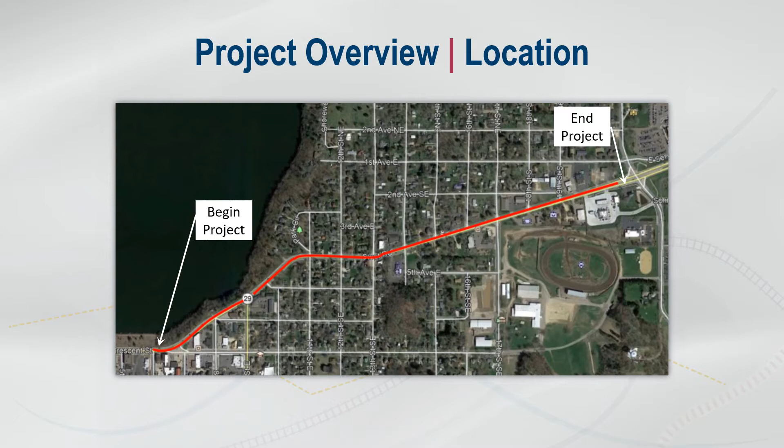Safety concerns regarding the segment of roadway have been on both the city's and the DOT's radar for some time. Between 2013 and 2019, 163 crashes were reported, including 84 rear end, 27 side swipes, and 4 crashes involving bicycles or pedestrians. In 2019, WisDOT applied for and received Federal Highway Safety Improvement Program funding to address some of the safety concerns in this corridor.

While there are several challenges and longer-term needs within this segment of roadway, the primary objective of this project is to make Stout Road safer for motorists and pedestrians.

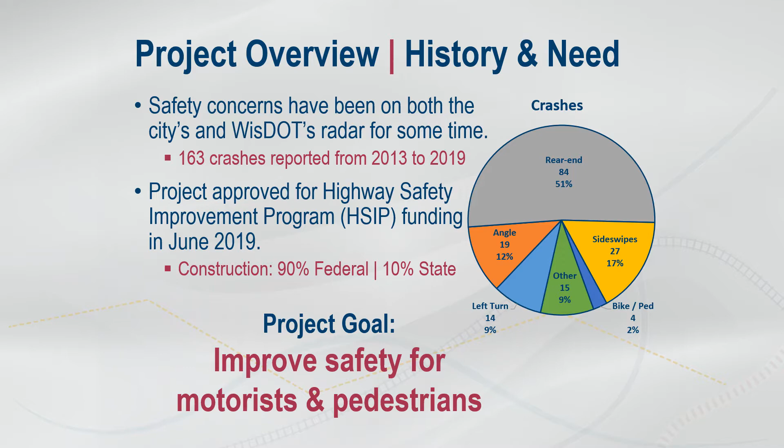Staying with the issue of safety along this corridor, there is a high number of crashes involving rear-end and left-turning collisions because of the high number of intersections and commercial and residential driveways. Many of these crashes can be attributed to the fact that there currently are no designated turn lanes for left-turn movements.

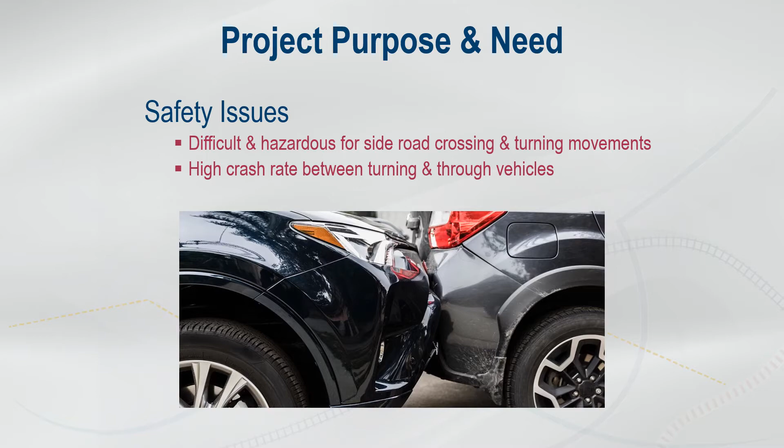Safety for bikes and pedestrians is a growing concern along this segment of US 12. With 4 lanes of traffic to cross, a distance of close to 50 feet, finding a safe opportunity to cross in a single movement can be difficult. With the current lane configuration, there is no center median or refuge area between the eastbound and westbound lanes to allow for a split crossing.

Another concern with urban roadways similar to the existing layout of this segment of US 12 is the multi-lane threat situation. This occurs when the vehicle in the outside lane stops to allow a pedestrian to cross. However, the stopped vehicle actually blocks the line of sight between the pedestrian and the moving vehicle in the inside lane. Currently, there are limited opportunities to safely cross US 12, with only 2 designated crosswalks within this 1 mile segment, one at 6th Street and another at 21st Street.

Biking along this roadway also can be a challenge. Currently, there are no designated bike lanes, so any bicyclists using this roadway must use the lanes designated for motor vehicle traffic, which may lead to conflict between automobiles and bicycles and can be unsafe.

Finally, many of the sidewalk curb ramps throughout this area are outdated and do not meet current standards under the Americans with Disabilities Act, or ADA. This can be especially challenging for visually impaired pedestrians or those using wheelchairs.

In addition to the safety concerns, the pavement surface also is showing signs of distress. The existing concrete is cracking, joints are beginning to fail, and maintenance is needed to extend the life of the pavement until a full reconstruction or expansion project is budgeted and planned for. This type of improvement is unlikely to occur for another 10 years or more.

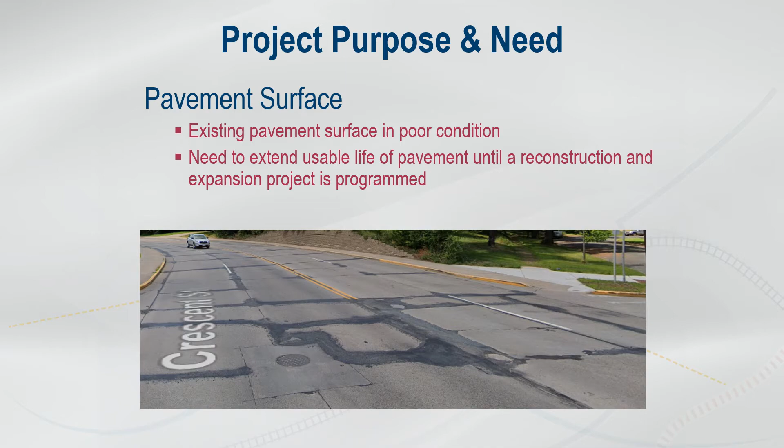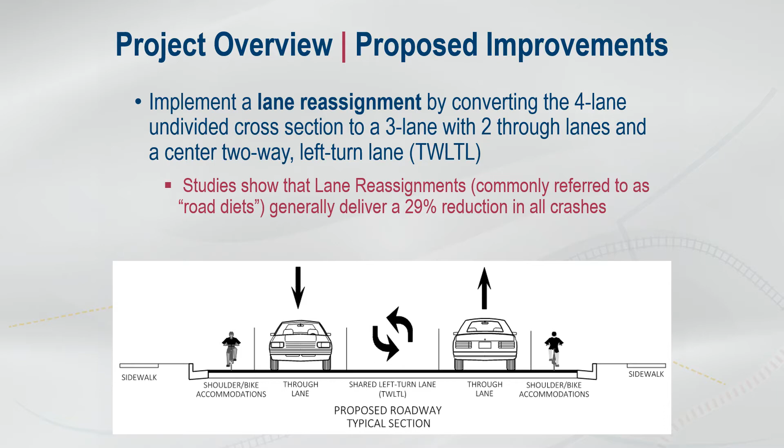The primary improvement proposed with this project involves implementing lane reassignment. It is proposed to convert the 4-lane road to a 3-lane section, having 2 through lanes and designating a shared left turn lane, or two-way left-turn lane, down the center of the roadway. Studies show that lane reassignments or road diets generally deliver up to a 29% reduction in all crashes.

One of the biggest benefits of the lane reassignment is that it removes the left turning movements from the through traffic. This allows room for vehicles turning left into the numerous side roads and driveways to decelerate and safely wait for a clear opportunity to cross while through traffic can continue.

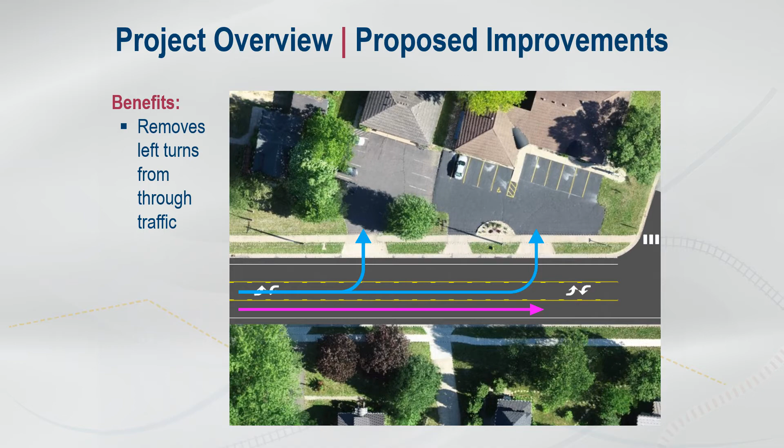Other benefits associated with the lane reassignment include the addition of available refuge area for pedestrians in the center of the roadway. The center shared turn lane area, which is 12 feet wide, will provide an area outside of through traffic for bicyclists and pedestrians to safely stage when not able to cross the entire roadway in one movement. Also, since the number of through lanes in each direction has been reduced, the multi-lane threat condition that currently exists is no longer present. The width of US 12 will remain unchanged.

With the proposed lane reassignment, excess width will be available between 9th Street and 21st Street. This area is proposed to be designated for bike lanes.

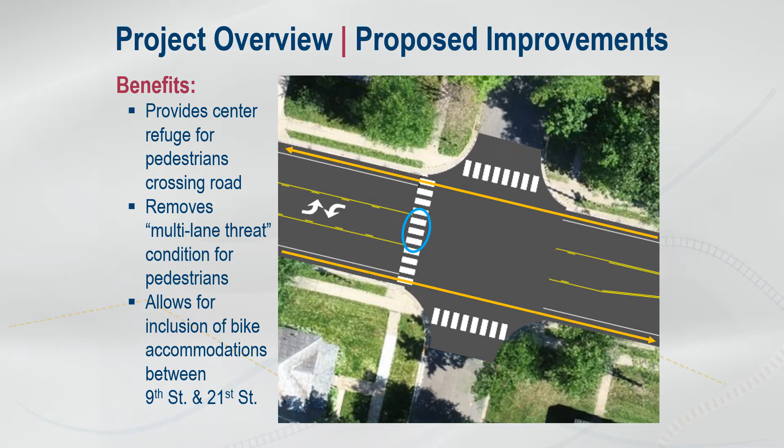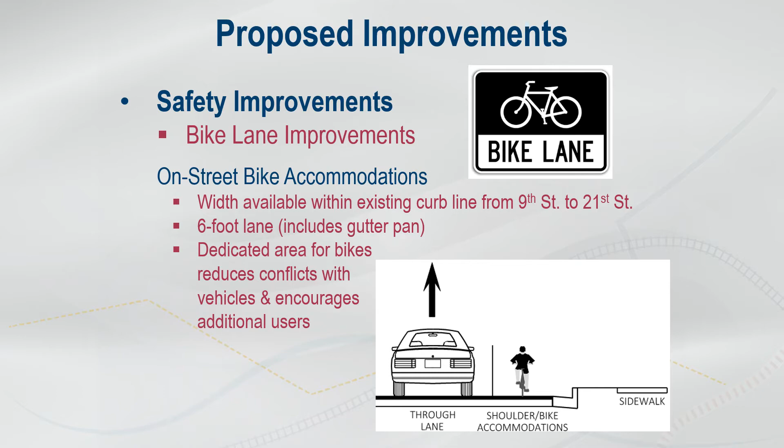It is proposed to designate a 6-foot wide bike lane on each side of US 12 between 9th and 21st Streets. This dedicated area reduces conflicts between bikes and vehicles and improves the overall safety of the project corridor. Furthermore, studies indicate that designating bike facilities encourages more people to use bikes for commuting and short trips, thus reducing motor vehicle trips.

As part of this project, it is proposed to remove the 5th Avenue direct access to US 12. With 9th Street being a higher volume street in Menomonie, providing an improved intersection at US 12 was determined as a benefit both for traffic operations and for safety. 5th Avenue is approximately 250 feet away from 9th Street, and safety benefits could be obtained from reducing the number of conflict points in this short space. Furthermore, providing a longer dedicated left turn storage area for 9th Street will help maintain through traffic on US 12.

It is proposed to connect 10th Street and 5th Avenue with a short curve. The area of right-of-way from the removed portion of 5th Avenue will be graded to match the surrounding properties and landscaped.

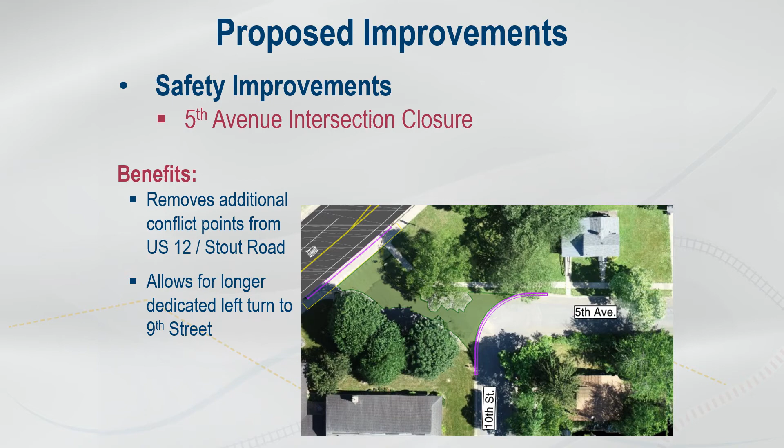As part of the funding allocated for this project, improvements to crosswalks on US 12 are also proposed. At this time, 2 locations have been identified for new crossings: near 14th and 15th Street, and near 18th and 19th Street. Some of the enhancements under consideration at the proposed crossings include raised median islands, installation of warning devices such as rapid rectangular flashing beacons, additional advanced warning signs, and additional pavement markings.

The project team is considering multiple options for locations to place crosswalk enhancements. Public involvement and input is critical in this process, and we are requesting feedback from residents and active users of this corridor. Please visit the project website for more information regarding the locations currently under consideration for enhanced crosswalks and share your thoughts with the project team.

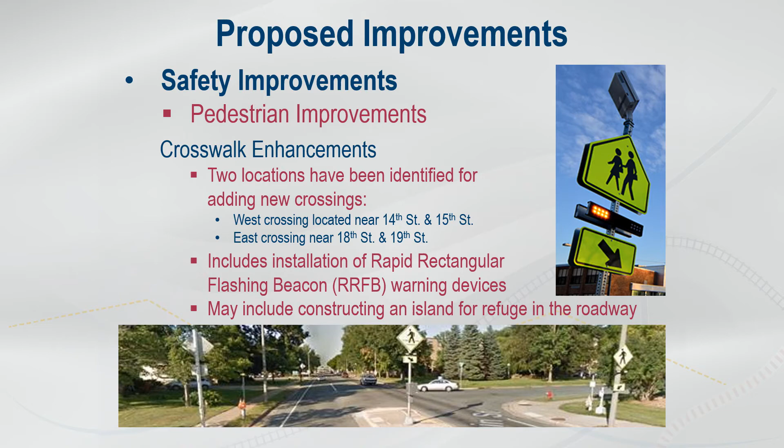With most WisDOT projects in urban areas, the curb ramps are surveyed and evaluated for compliance to current ADA accessibility guidelines. Items such as the slope of the ramps, the width, and wheelchair clearances will be measured and compared to acceptable standards. Improvements will be made to non-compliant ramps unless the improvement would require undue cost and impacts to adjacent properties or other infrastructure. Designers will work to make the improvements with the least amount of impacts.

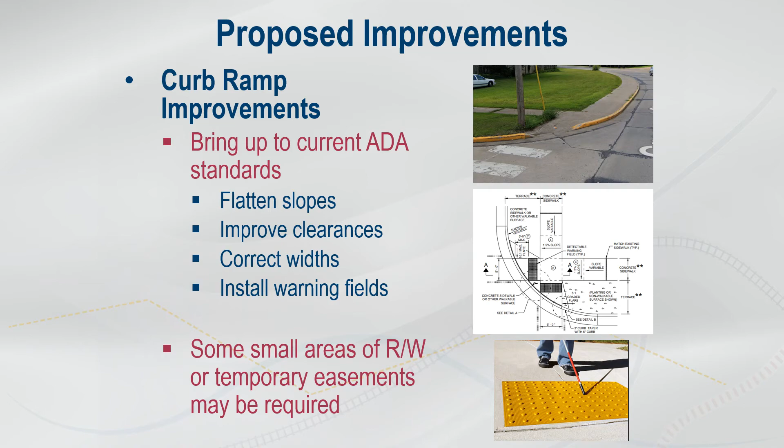However, it is possible that a small amount of right-of-way or temporary easements may be required. If right-of-way or temporary easements are required, a right-of-way plat will be developed. The real estate acquisition portion of the project is anticipated to begin in early 2021.

Changing the number of lanes will affect the way traffic flows along US 12. Currently, US 12 includes 2 lanes in each direction without a dedicated lane for left turns. The proposed design includes a reduction to 1 lane in each direction, but includes a center lane for left turns in either direction. Changing the number of lanes is expected to improve traffic flow and reduce stops along US 12 by removing left turns from through traffic.

Side street movements and pedestrians will have safer access to US 12 with fewer lanes to cross. Reducing US 12 by 1 lane will result in a reduction in gaps available to enter US 12 from side streets. This is anticipated to moderately increase delay for certain movements during peak travel periods. Local traffic may increase use of parallel routes to avoid congestion when US 12 traffic is heaviest.

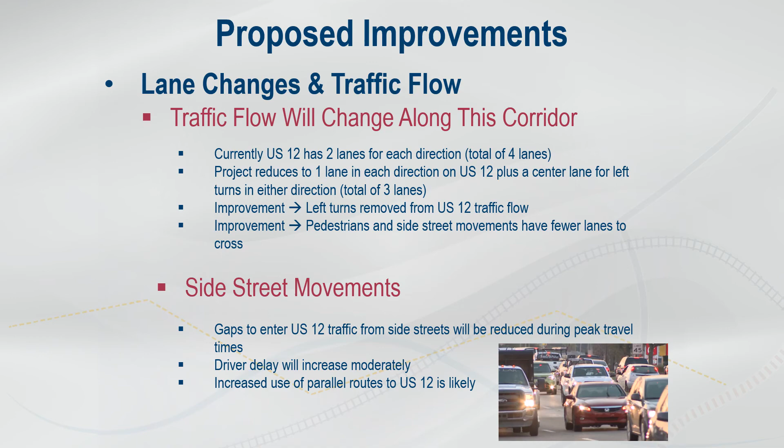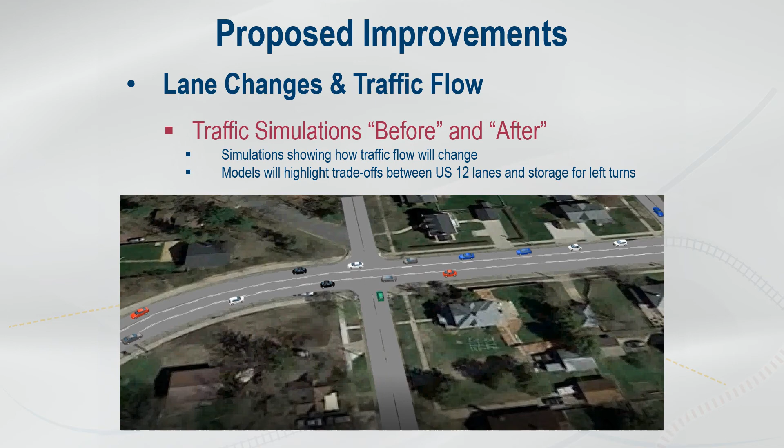The project team understands there have been many questions about how traffic flow will change as a result of this project. Traffic simulation models have been created to help visualize how the proposed lane changes will function. Please visit the project website for links to animations showing traffic flow before and after the proposed lane changes on US 12.

The project schedule is currently outlined as follows. Preliminary plans and the right-of-way plat are scheduled to be completed by the end of this year. If any real estate acquisition is required, this process will begin in early 2021. Final plans are scheduled to be completed by August of 2021, and construction will begin in 2022.

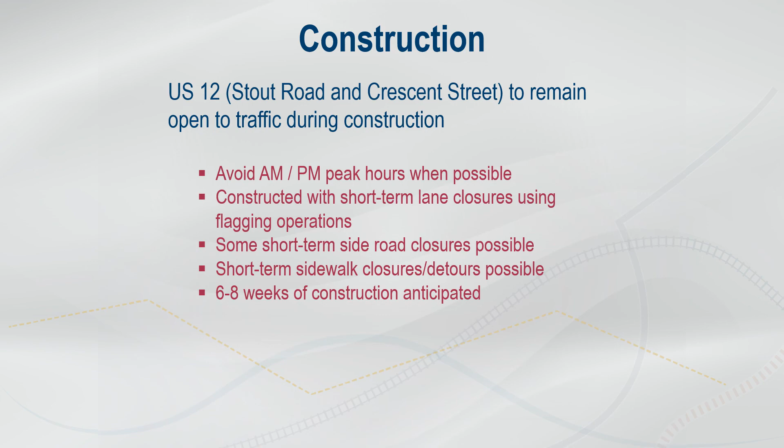No closure or detour is required for this project. Most work can be completed under traffic using short-term lane closures with flagging operations. Some short-term side road closures may be possible. Efforts will be made to avoid lane closures or heavy work during AM and PM peak traffic times. During curb ramp construction, it may be necessary to temporarily close sections of sidewalks. However, detours or accommodations will be made.

The Wisconsin Department of Transportation would like to thank you for listening to this presentation of the proposed construction project on US 12 in the city of Menomonie in Dunn County.